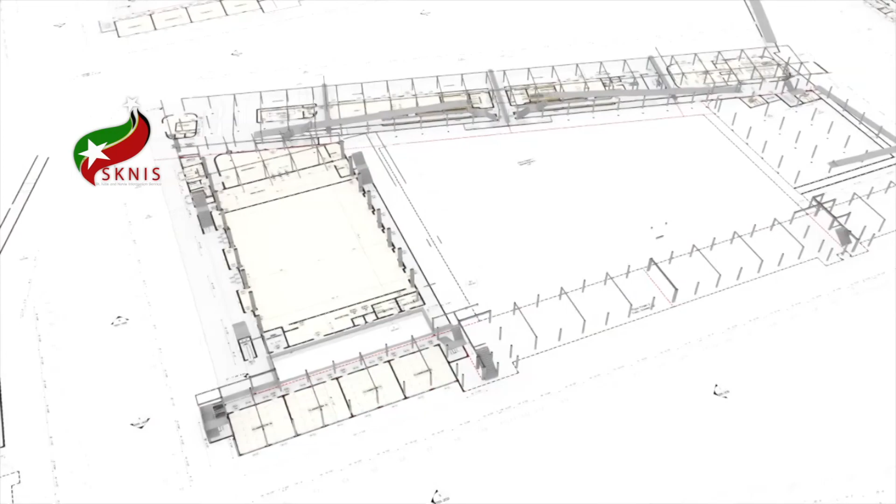If we are going to make the claim that the New Basseterre High School will pose a threat to the aquifer, then perhaps we need to move all of the buildings located on the 5,000 acres of land which comprise the aquifer, because the aquifer isn't just on that particular area where the New Basseterre High School is to be built.

The engineers, the relevant professionals, the experts, have looked at the construction of the New Basseterre High School and made certain recommendations. The school will have a sewage plant utilized, and that is why the report says there will be no impact in terms of sewage posing a risk to the aquifer, unlike the many other properties on the aquifer which utilize septic tanks, and that is well documented.

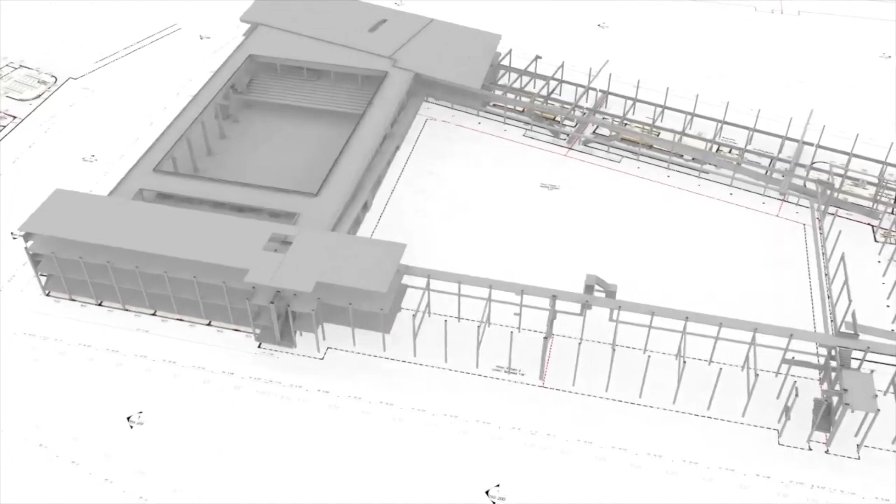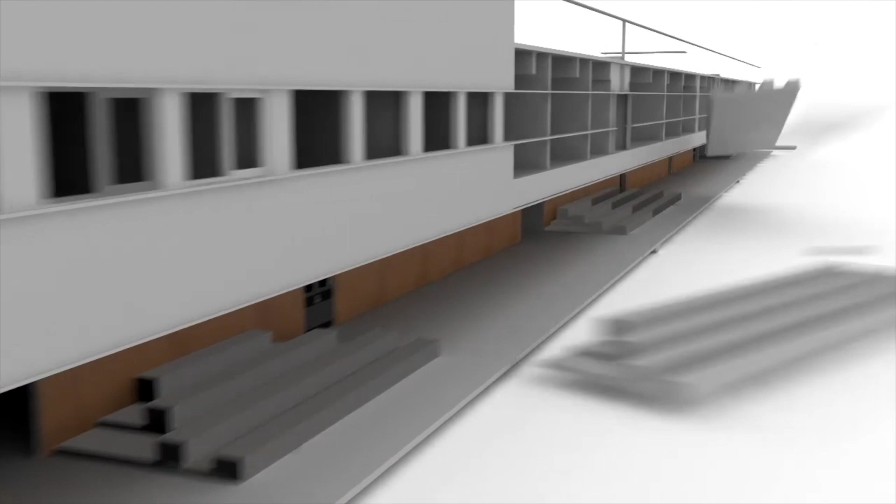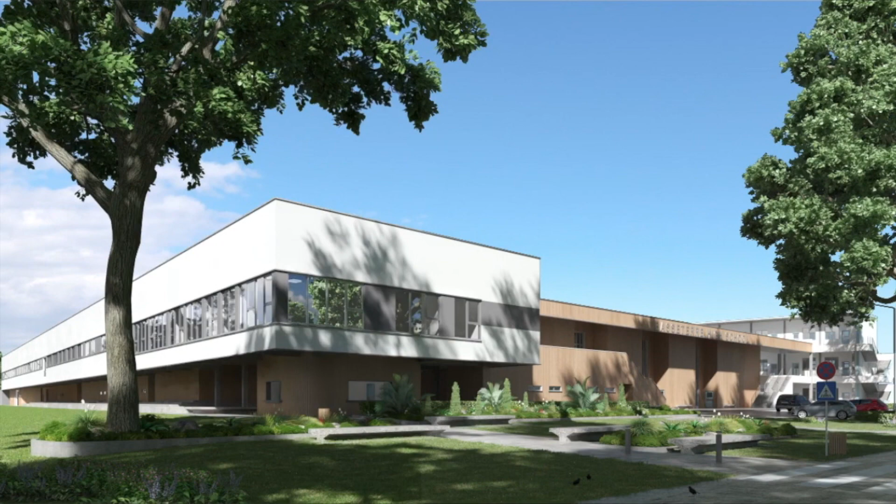The report also states that the Basseterre High School is to be built downstream of the aquifer. The water flows downstream, not upstream. I've heard some persons say, for example, in the event of an earthquake, but no matter where you build a school, you still will have that particular risk. In my view, the biggest risk in an earthquake is actually damage and injuries to students and persons, rather than persons worrying about water at that point in time.

But based on all the reports we have seen thus far, all of the necessary precautions are being taken with respect to the construction of the school.

As you just intimated, I was the project manager of the UNEP-funded project that looked at the possibility of contamination within the Basseterre wellfield area.

I know Ken Richards is a good journalist, and I would invite him to examine, or as a matter of fact, I will provide him, once he gives me his email address after this press conference, a copy of what is called the Water Resource Management Plan, which was one of the outcomes of the Ocean Earth Technology report or investigations done in the Basseterre wellfield. So you could move away from speculation and get as close as humanly possible to the truth, and the truth will be found in that report.

As a matter of fact, I can say that the decision made back in the 1970s not to utilize any part of that wellfield — it has been said several times, and you must have this planted in your memory — the Basseterre Valley Aquifer spans some 5,000 acres of land. It starts in the west at Olivees Mountain, spans across to the northeast of the Canada Hills and to the east of the Conaree Hills. I want that implanted in your mind when we talk about the aquifer.

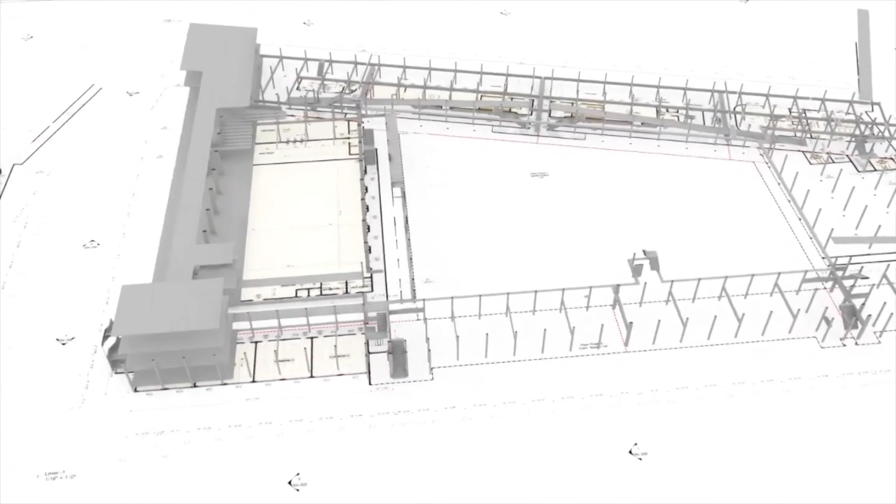I was born in Newtown, East Basseterre. We went to the Ponds pasture, which is just adjacent, south to where we're building. The Ponds pasture was, as he said, pond. There was no potable water there, no drinking water there.

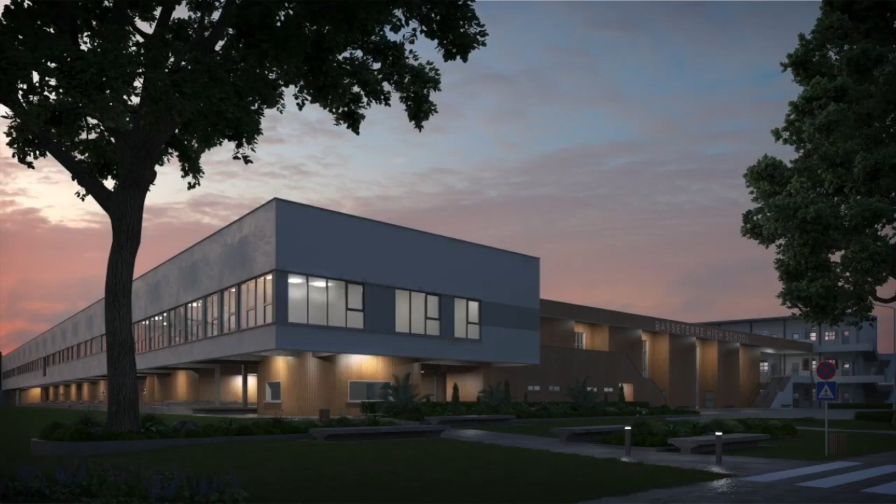The area where we're building the school, there's a Seventh-day Adventist school there, other buildings there. The area where we're building the Basseterre High School is the area in which there is what we call brackish water. As a matter of fact, if you do your research, you would find there are two wells in the area, one next to the TDC home and building, and one right next to the Newtown playing field. Those wells were never used for drinking water; they were used to irrigate the fields.

The Ferraro, I think it's Mr. Ferraro who owned Ponds Estate, watered the fields. You had the highest content of sugar, the best sugar cane used to be grown in that area. So there was no potable water, no drinking water in that area.

So I want you to make the point again that the assessment was made, the report is there for you to read. I can provide a copy of the report with you. But back then, water was not a sexy topic, you know. So nobody came to the town halls we had. The media were invited.

But now with this thing about school and trying to create sensation and trying to play politics, you hear this thing about building on the aquifer. The aquifer spans 5,000 acres. The potable water and the wells, if you drive tonight, you will see them all, the light lit up at the east of the Kim Collins Highway. You see about 5 or 6 wells over there.

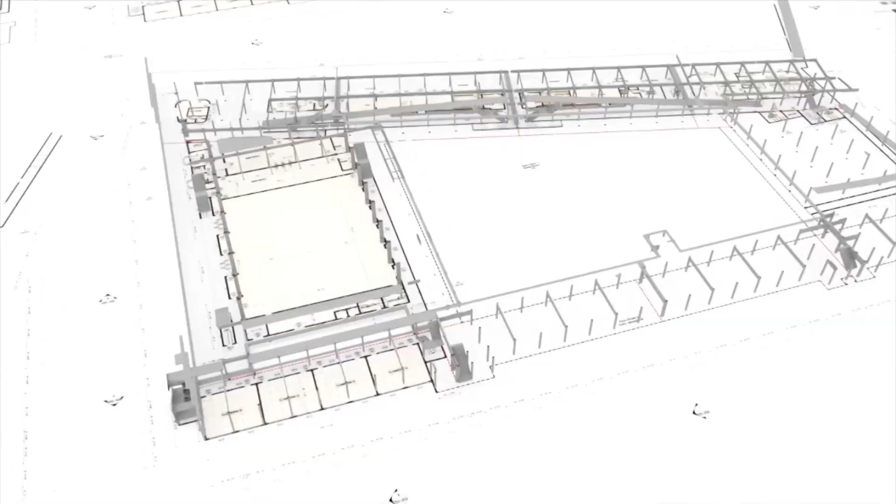And what we are intending to do is move the wells north of the airport. North of the airport, we found 2 wells, as a matter of fact, at Shadwell. One with, I think, 500,000 gallons per day, and there's another one we expect to get some 300 or 400,000 gallons per day.

So we are taking proactive measures to bring the other well online, and even that will help us mitigate some of the concerns. But yes, all the other technological steps are being taken as intimated by the deputy.

So let's not continue to play politics with this aquifer and this well field. Yes, there's a concern, and I say it to you as somebody born, raised, and still living in the area. And I can assure, in particular, the people of East Basseterre that their water is going to be safe, always safe, and your team with the administration and your parliamentary representative will ensure that this is done.

And when I speak, I don't want to sound boastful. I speak with authority, because as the former Prime Minister said, yes, he called me. He called me when they were about to lose the funding from the UNEP. And I had to rescue the then administration, because they had this money sitting down there and nothing was being done. When they were about to lose the funding for the project, he called me, and I went into the project, was there for 2 years. So again, when I speak, I speak with authority.